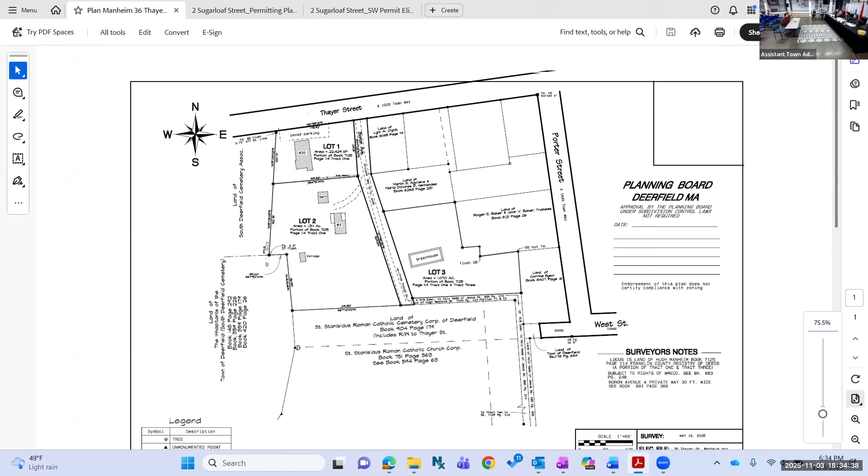Okay, if you'd like to introduce yourself and tell us a little bit about what you do. Hi, so my name is Matt Manheim, and this is Becky Keesby. We're here as a representative for the property owner, Hugh Manheim, looking to break the contiguous property into 3 separate lots: 39 Thayer Street, which is the old BBA Deli as it used to be known; 4 Bourne Avenue, which we're the residents of; and then the lot across the street with the agricultural greenhouse.

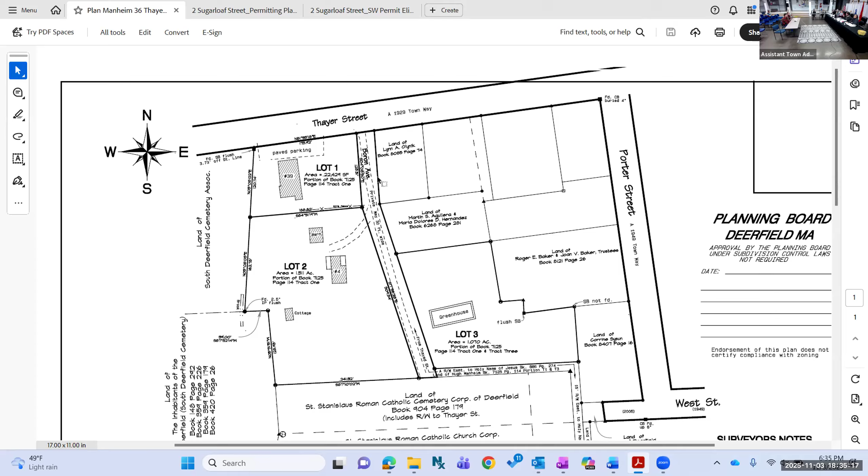So the question was whether you have enough frontage, including on Bourne Avenue. Does everyone from the planning board follow? There's so many lines, it was a little confusing looking at it. Lot 1, lot 2, lot 3 — lot 1 is going to be the smallest one, then we've got lot 2, and lot 3 is the entire area on the right side of the map. Even though lot 2 is on Bourne, it still has enough frontage.

And so, as has been stated, although you could separate them, they aren't necessarily building lots — that's up to meeting with the building inspector to make sure everything works. Correct, yes. Lot 2 already has 4 Bourne Avenue on it, so I'm not looking to build anything on it. I'm just looking to do estate planning, really.

And I think our building commissioner is online too, and as far as I know, he said there are no issues. From the planning board, do I hear questions? Kathy?

Kathy Wittrova: So is Bourne Street a town-owned road? No, it's a private way. So who maintains it and who plows it? That was kind of a question that was up in the air for a while and nobody really knew. Prior to Hugh purchasing the property, the town plowed it. Then once it was discovered it was a private way, I myself have been plowing and maintaining it for now. I know that the cemetery has an easement, as well as 3 Bourne Avenue, and I believe 4 would also have an easement. There are also public utilities that run down it.

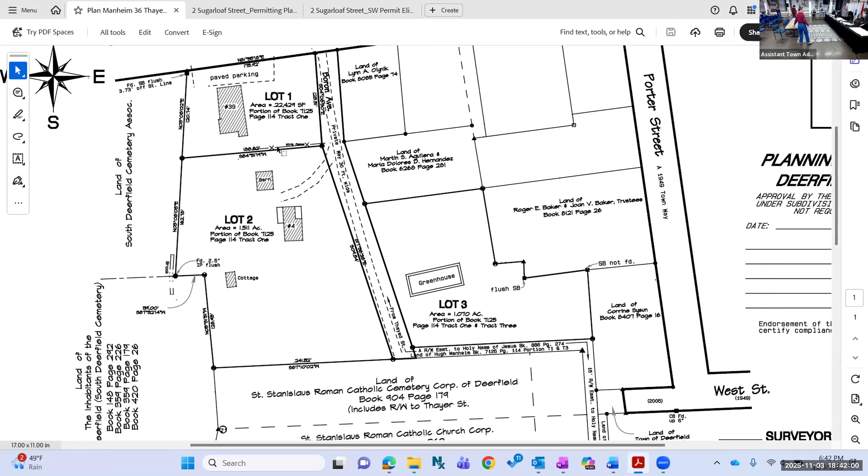Okay, all right, let's get rolling. Oh, deeded easement things. You have a marker? Good enough for that, right?

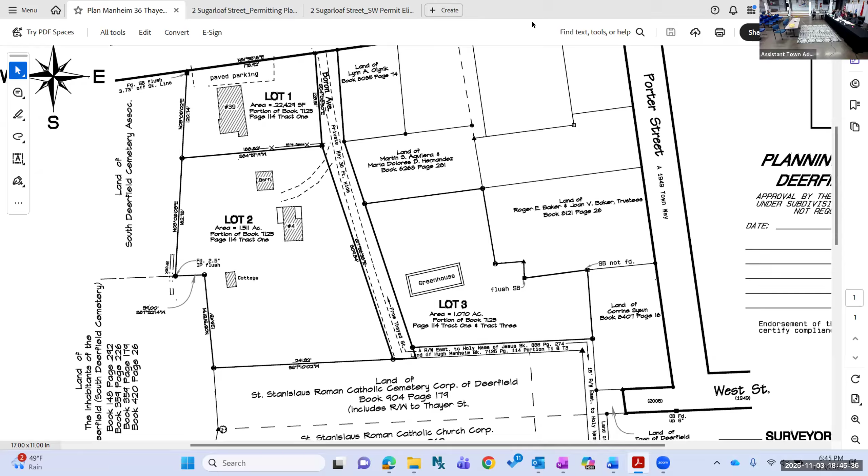Site plan review for 2 Sugarloaf Street. Notice is hereby given that the Deerfield Planning Board will hold a public hearing on Monday, November 3rd, 2025 at 6:30 PM on an application filed by Sugarloaf Development LLC for site plan review for construction of a 3-story mixed-use building with ground floor commercial space and 12 residential units above, located at 2 Sugarloaf, identified in the assessor's records as map 168, lot 13, pursuant to bylaw chapter 179, Section 5400. Application documents are available for review in the foyer of municipal offices or online at www.deerfieldmass.us in the calendar event.

Who writes these, and why are they run-on sentences? It's like, take a breath in between. Yeah, well, lawyers should have their punctuation a little better than that.

Okay, all right, welcome. Speaking of lawyers, for the record, Tom Reidy, an attorney with Bacon Wilson out of Amherst. On behalf of Sugarloaf Development in its application for site plan review, as the chair noted, with me this evening I've got Justin Colleen and Jason Keitsa, the developers, for a very exciting project, a redevelopment here in downtown, just a stone's throw from where we are, at the old Cumberland Farms property.

With us we've got some folks from Proterra, site engineers, Ben and Tom, and we also have Jonathan Salvon from Kuhn Riddle, who is the architect of the project. So, really high level, I'll start, and then I'll turn it over to Jonathan, and then we'll turn it over to Tom, and then back here for questions.

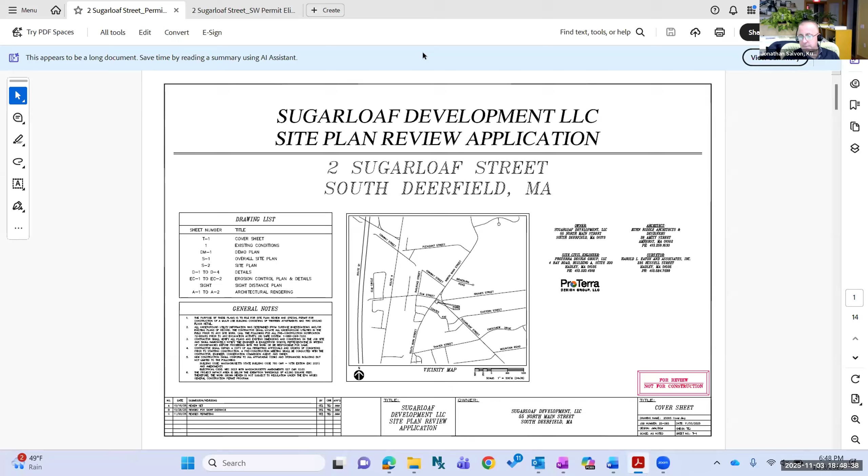I guess I'll start off, make sure folks can hear me. Can folks hear me? You're going to have to speak a little louder. Okay, let me get my mic a little closer to my mouth there. Is that better? Yes? Yes, okay, great. So good evening, I'm going to walk you through the building. I'm going to share my screen if I may. Is that possible? Yes, they just need to give you sharing access. Okay, here we go, that should be good now.

Great, should I share the right screen? Let's see here. Okay, does everybody see the Google Earth image? Yes, yes, great. Just to give a quick bit of context, as Tom said, it's very close to where you're meeting right now.

I'm sure everyone knows where it is, but just for full clarity and to start the conversation, we're looking at this site here where the Cumberland Farms was for a long time. It's sort of like a gap, almost a missing hole in the center of the town, that's really looking to get that space filled in and look like it's more properly part of downtown. So that was where we started with our thinking when Jason approached me to look at this site — how do we fill it in appropriately.

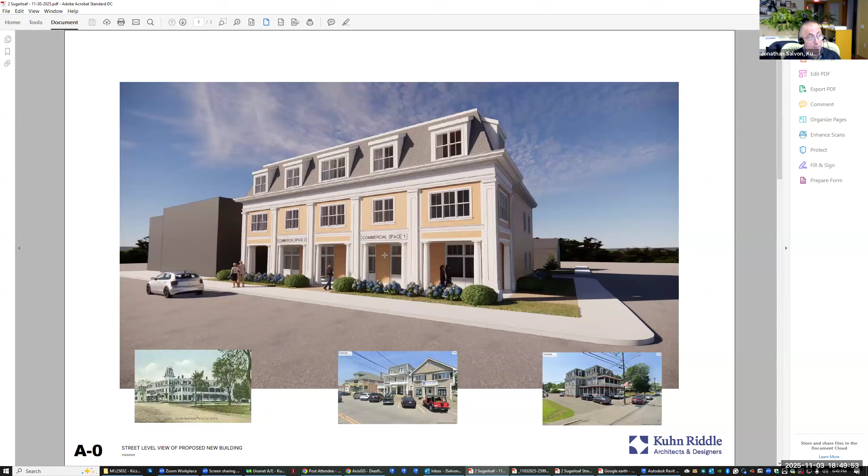So I'm going to take this down and show you the exterior of what we're proposing. Obviously we're standing somewhere in the middle of Sugarloaf Street here looking at the building. One of the first things I did was to think and look and see what could be the precedents for a 3-story building in the center of town.

There are a couple of buildings, one at 6 Elm Street, one at 13 Elm Street, that have kind of a mansard look, a 2-story with a 3rd story that's kind of tucked behind a mansard roof. Doing a little more digging online, I found this wonderful photo of a 19th century hotel that occupied the site across the street that apparently sadly burned down at some point. So there is this precedent for the aesthetic we're presenting here today.

Just to orient you a little bit, again we're standing in Sugarloaf Street. The existing building in gray here, these are the 2 buildings that front Sugarloaf. The Wolfies building is kind of poking out a little bit behind our building over here. We would obviously take down the entire Cumberland Farms building.

Just switching pages here, for the details of the site plan, please look at the Proterra drawings. This is really just for orientation, but the existing building kind of sits back here, tucked in very close to the Wolfies restaurant. We're proposing to move the building up to align with the Sugarloaf building, so that it has a presence on the street.

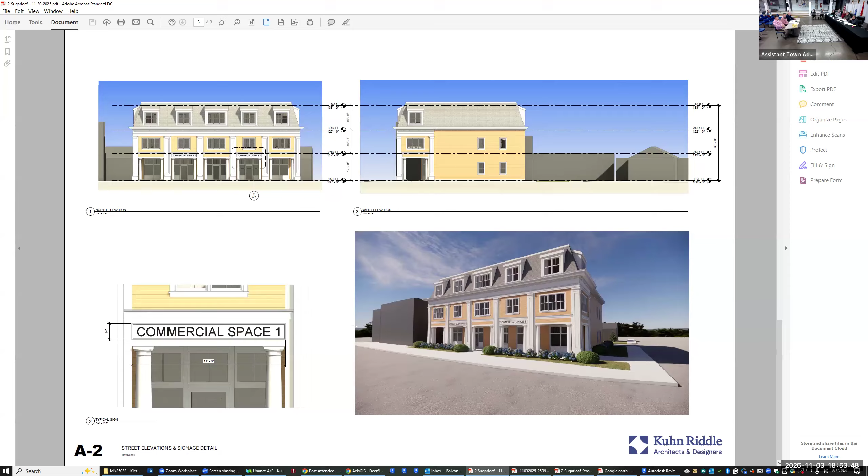This is Rachel Blaine. I know you'll get to it, parking, so I'm not going to ask about that, but with the main accesses, they're not from the front, right? They're going to be from the back? For parking, main access residential?

So obviously it's a very small lot, and we will talk a little more about the parking, but since Jason owns both of these parcels, the expectation is that they're going to have to share parking between the two. There's really only space for 2 accessible parking places behind the building, as well as a dumpster. Then there are, I believe, I've said 16 here, but I would go by the numbers on the Proterra site plan in case I've transcribed them incorrectly.

But what I'm asking, now maybe my orientation's off, but what I'm asking is, so access is from the back of the building for residential, is it, or is it? You have access actually from either direction. Either direction, both. Yeah, I see, there it is. Okay, there's an entrance on the back, correct, and there's another entrance on the front. Got it, thank you.

Now I see it. Was that another question? I'm sorry, yeah, is it, I'm clear now, sorry. Okay. That's not just a stairwell, that's an access point as well. I see, correct. Is the other an access point as well? This one, it really needs to be, we need a second stair, so this one would be, at least it's intended as egress only. The main stair, the one in the middle, will have the mailboxes next to it, and a way for folks to access storage in the basement and that sort of thing.

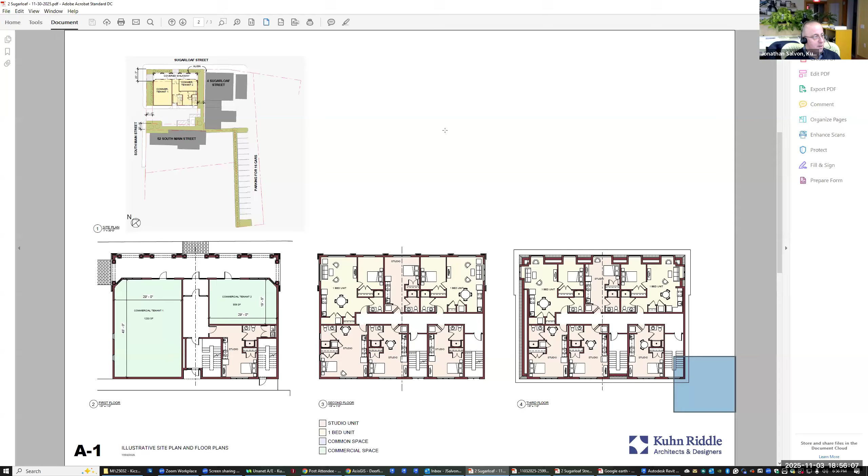And in the parking lot? At that point, we should probably move to the Proterra drawings. Let's put a pin in that.

I don't know if you have other questions for Jonathan at this point. You can obviously go back and forth between and amongst. So Tom, we'll tee you up if you want to walk us through the site plan. Okay, sounds good.

Am I sharing successfully there, and can everyone hear me okay? Yes. Great, thanks. Good evening, this is Tom Johnson with Proterra Design Group.

What I've got up here is the S2 sheet on our set of site plans that have been submitted. I just wanted to note, late this afternoon we sent in an updated set of plans. It incorporates a few more details that we worked through since the initial submittal. I'm sure you haven't had a lot of time to take a look at those, but our thought is that we get them over to you and then step through some of those changes to the plan set tonight, just in the interest of getting them in.

But what you see here - can you see the cursor on the screen here? Yes, okay great. Just for orientation, Sugarloaf Street is up here on the plan sheet. On this side you've got South Main Street, and this is the corner here. The old Cumberland Farms building sat back in the lot here.

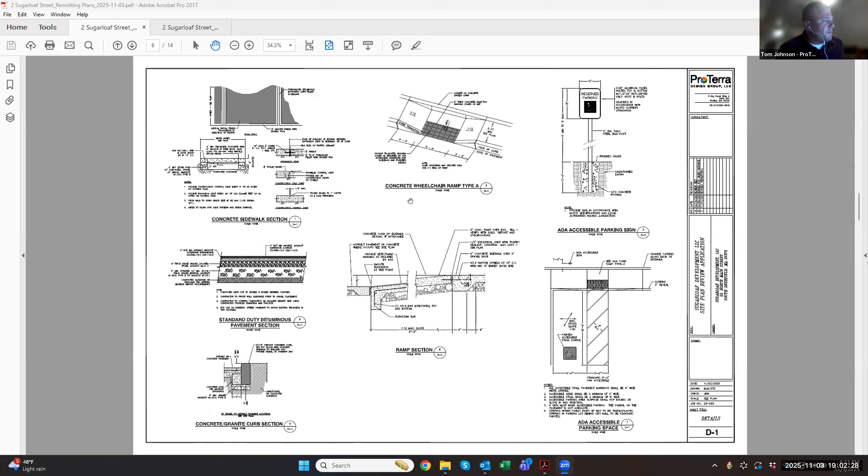As we talked about, there are some parking requirements here. Let's see if I can find the best sheet to talk about that on. Before I get there, we had a chance to submit these to the Chief Pechoric, just to give a review of the plan set. He came back with a comment and had a chance to meet with him and go through the comment.

His one concern was to make sure that any car coming down South Main Street was able to maintain a sight distance and see parked cars coming down, or cars approaching the intersection from Sugarloaf Street. These dash lines are kind of what a traffic book tells you need to have for sight distance.

Based on his input, we had some shrubs proposed on this corner, and we pulled those back. We also had another parking space intended, one more closer to the intersection, and we eliminated that. What it does is it opens up the sight distance even further beyond what the traffic books say you need here.

He took a look at this revised sketch and was happy with it. I think somewhere you'll see some correspondence back to him, from him, to the planning board that says he's happy with the adjustments we made to the plans as a result of his comments.

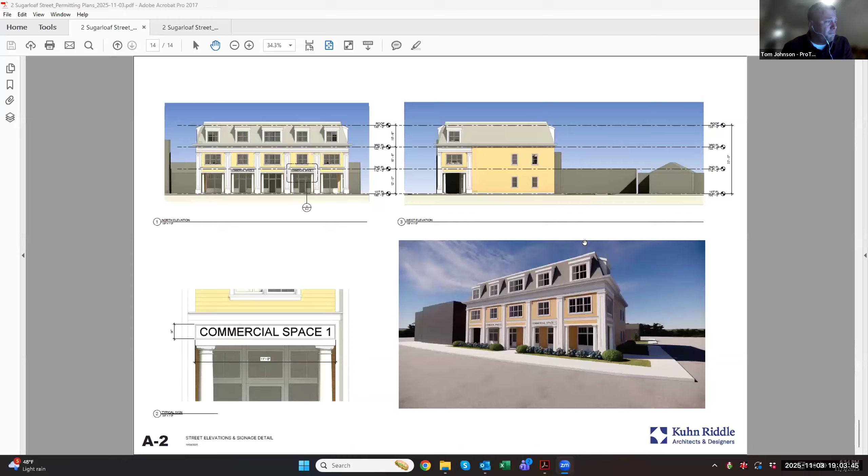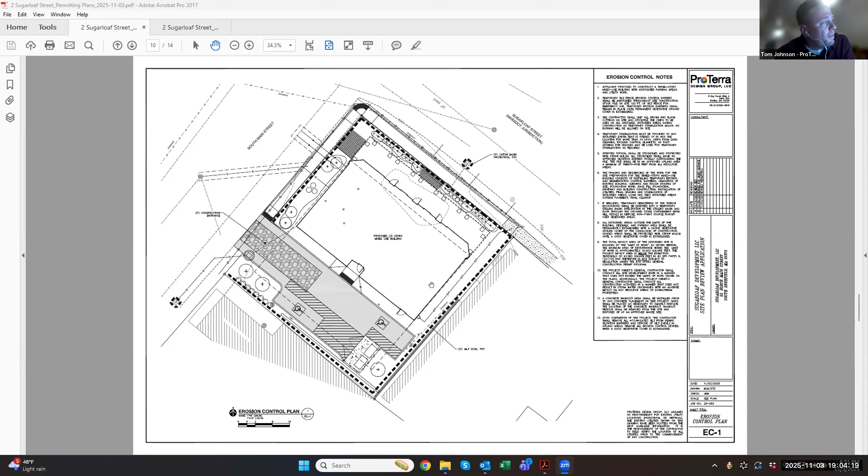These are just kind of typical detail sheets. This is an erosion control plan. Our intent would be prior to the start of construction to wrap the construction site in a silt sock, put a silt bag in the existing catch basins at the street level, and put a little bit of a construction entrance in here, just ways to control and mitigate for any erosion that may occur and limit any silt-laden runoff from the site. That's its own kind of sheet on the plan set here.

Okay, here it is, this is the one I'm looking for. As mentioned, we're proposing 2 parking spaces behind the building. We've got a space planned for 2 in front of the building here. This obviously will require coordination with DOT. And then there's an existing parking lot, which is on the other side of 4 Sugarloaf Street.

That right now is a gravel parking lot. For the purposes of parking space count, we kind of laid it in here and then fit standard parking spaces and came up with a parking space count. You can see we've got 2 parallel, 4, 16, and 12 here. And there are some existing dumpsters for this building that we've kind of put as a placeholder here.

So from that, for 2 Sugarloaf Street, we're saying based upon the zoning as it currently exists, there's a requirement for 40 spaces. One of the things that we talked about, and I know Jason and Justin have maybe talked about prior to submitting the application, was that because these are units, but the majority of them are smaller units, studio type apartments, and they have experience with these types of apartments in this area as well.

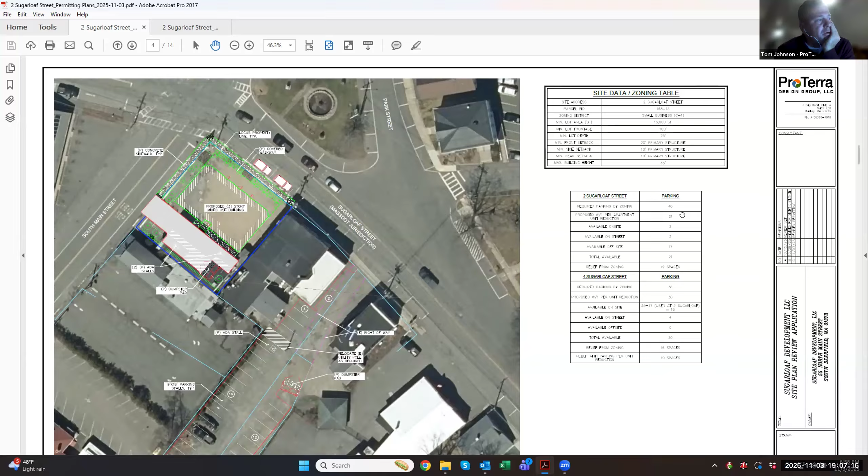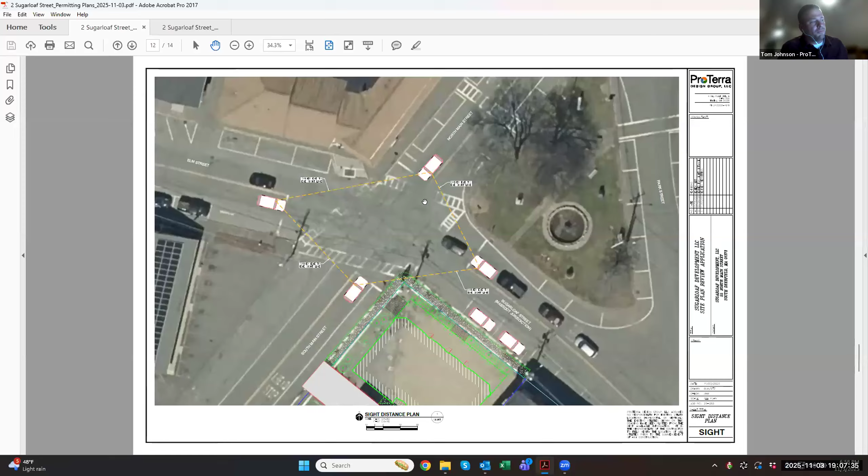Yep, so given that we're able to match the 21 required with the 21 at a 1 per unit count. I have a quick question - is that an indicator that each living unit has one car? Yes. Even the one bedrooms? Yes. You can see that.

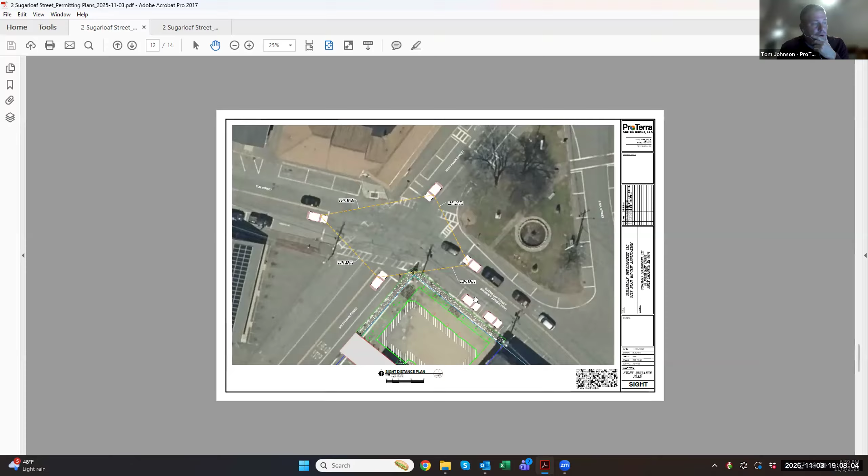Are there dedicated commercial space cars? Sure, so there are 2 spots proposed right in front of the building on the street. There's also other street parking available here, and there's also the Leary lot, which is on the opposite side of the intersection. So there are other available street parking spots, but yes, in that overall count, the required number is taking into consideration the number required for the square footage of the retail space there. Thank you.

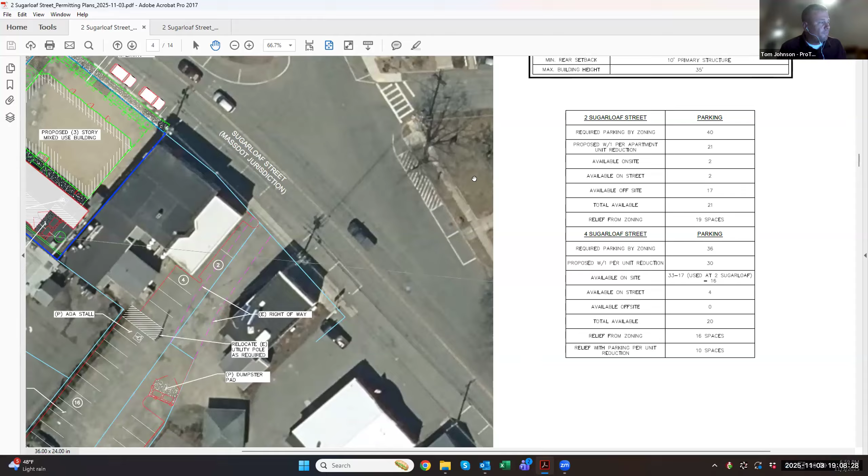I guess the assumption is that no couples are gonna live in a 1-bedroom apartment? If a couple had 2 cars, we would hope the town would consider some of the on-street parking or the Leary lot for them to utilize. We own a myriad of other property in this town, and none of those have a 2.5 per unit parking ratio. In fact, you might have 1 parking spot per unit at most. And so our typical problems are not our tenants - there are other downtown cars parking in our spots, which creates a lack of parking for us.

So these are resident parking only, so that it's clear these people have someplace to park. Your tenants would all be allocated one resident dedicated parking spot per unit, right? Yep. Which, what I'm saying is, then sufficient for us for the other 100 apartments we have downtown.

I would say there's probably also a chance that a number of folks actually don't have any cars. You're on the bus line, and these are small studio apartments - I wouldn't say very small, but smaller studio apartments. So it's not necessarily set up for more than 2 people.

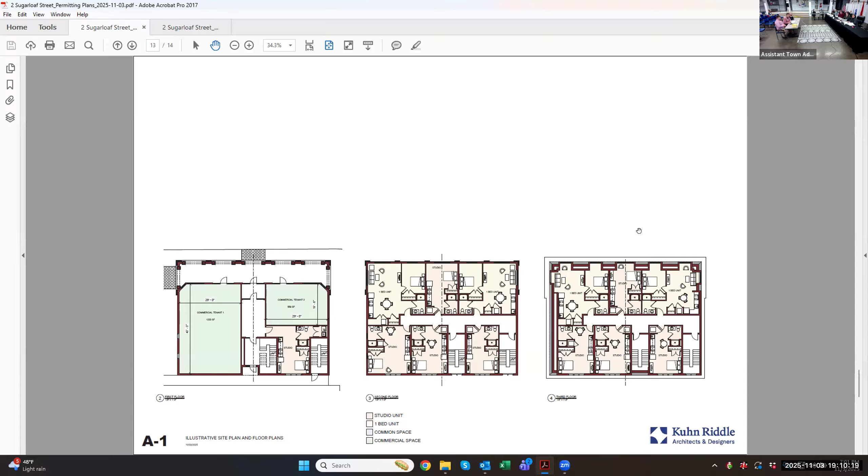Sorry, I have one more question about the parking. So I'm looking at where the ADA parking is, and I'm curious about the access to the building from the ADA spot. So there's 2 ADA spots right behind the building here, and access is through this door. Right.

I think the other consideration is that from May until September, Treehouse is rocking, literally. And the parking is so congested - in theory everybody goes to Yankee Candle and they're shuttled, but really the parking in South Deerfield is jammed. There is nowhere to park or turn. For that huge span of time, parking is a real consideration. It's just trying to go pick up a pizza, never mind people living there trying to park and manage their own singular parking space.

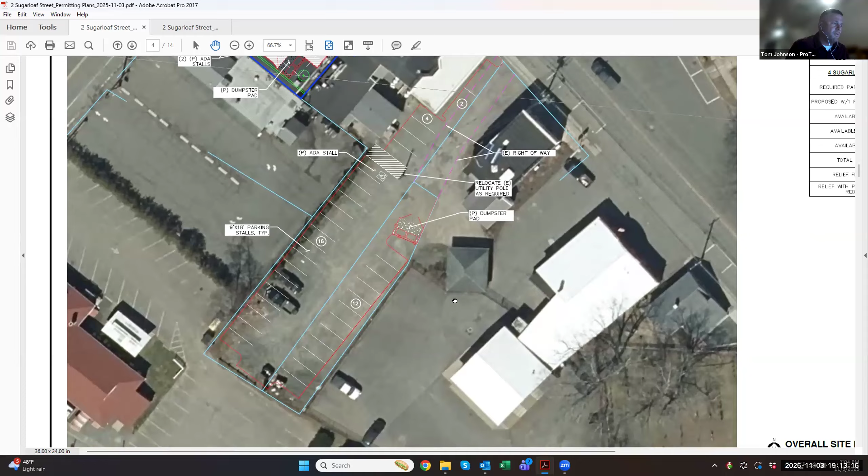So this whole blue area is the old lot line, so these are contiguous. It is one big parking area here. If you're familiar, Fisher's is here — they have a fenced, paved parking lot back in this area. And on this side is the Polish Club, and this is Wolfie's kind of.

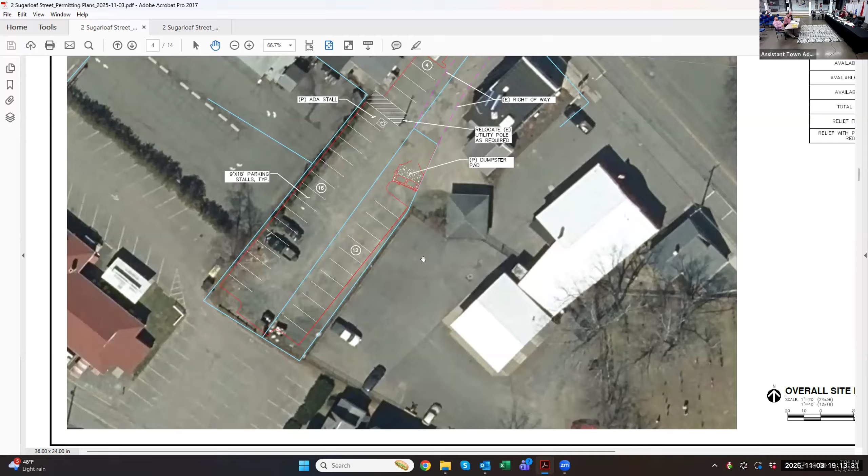So within the red outline, you're saying there's 16, 12, 4, and 2. Okay, so is that parking lot utilized by other businesses? Because you said you guys own the building at 4 Sugarloaf. So how many spaces are taken during the day? Is it just during the day?

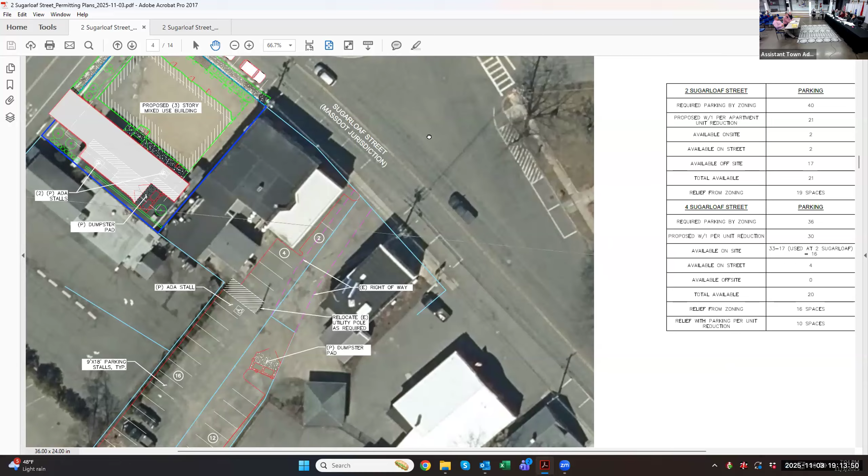Okay, six spaces. And I have a question for Alex, if you know — how many spaces are in the Leary lot? And are there also spaces for the apartments in the back? Do you know how many are utilized there? Because making the assumption that people can park in the Leary lot may not be a good assumption.

It's empty right now, though. I drove by on the way in and it was empty — our lot was full, but the Leary lot doesn't get a lot of use on this side, at least. So there's definitely a lot of potential there. Maybe everyone's out on the town, or down at something else. I don't know.

I can't remember the exact counts, but I'm pretty sure there are upwards of 55 parking spaces in the Leary lot, not including accessible spaces. We don't have true data on usability, but I've gone over there a lot to take photos for our Elm Street project and for murals for LCC. I don't think I've ever seen it even close to 50% full.

Maybe more than 10 cars there at most, even with downtown full. We own 55 North Main Street, and that gets jam-packed with cars. The Leary lot could take more, but — sorry, I'm done.

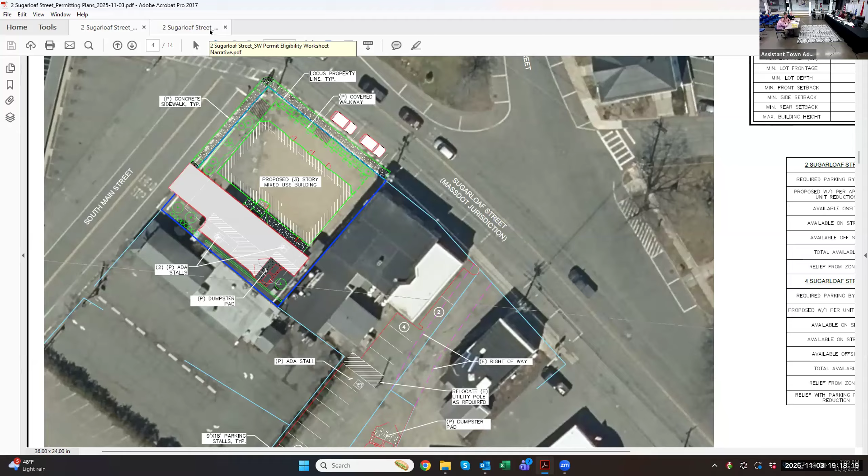Can you answer that, Tom? Paving, you're saying? How much paving are we adding? Yep. I mean, the site already has pavement on it, and I think this is what the applicant was just pointing to, is that they're not changing a lot of the pervious nature of the spot.

So that's what I- yeah, actually, it's a good question, and it's also something I forgot to step through. One of the other things that we submitted late today was the Town of Deerfield Stormwater Permit worksheet.

And I will answer the pavement question here. We stepped through this because of the size of the lot, which is around 9,000 square feet. We're under the threshold required to go through the stormwater permit process with the town. So this just documents that we're under that 12,500 square foot threshold. But...

We did put together a little memo at the end of this checklist here. Somewhere in here - so the existing site is currently 98% impervious. They have ripped up the old tanks and that's gravel now, but historically that's all been paved and impervious. The proposed improvements will reduce the impervious area by about 2,614 square feet, so that puts us at 70% coverage.

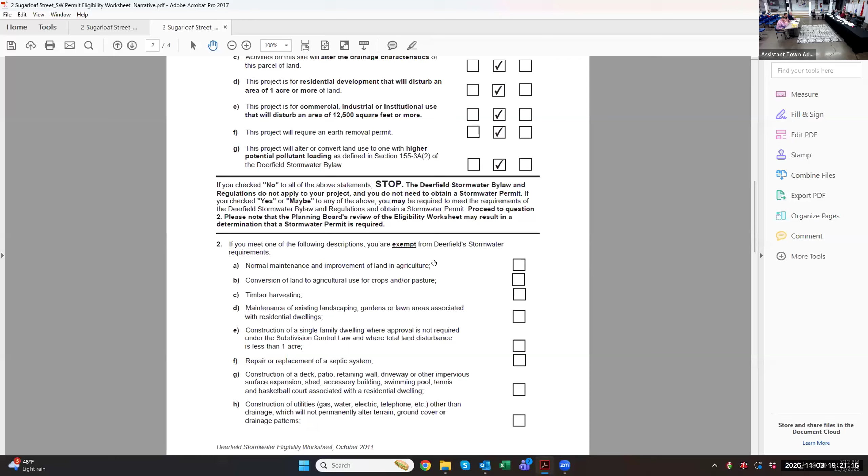So I have a question. It says this is a new development or redevelopment project and it's marked no. So what is it classified as if it's neither of those? So this we went around in the office going, what the heck does this sheet mean here? If you look at number E, it says, well, if you're commercial and you're under 12,500 square feet, you say no.

And what we finally realized is you had to go into the definitions here, and redevelopment is defined as any construction, alteration, transportation, or improvement exceeding land disturbance of 12,500 square feet, where the existing land use is commercial. So it's saying if you were to be called redevelopment, it has to be more than 12,500 square feet. And in this case, we're below that 12,500 square feet.

So no - a new development would be, if I understand this right, and I think Ben from my office is on here, he can correct me if I'm wrong, but I think new development would be a treed, undeveloped lot that you're starting from scratch.

Okay, so because you're under 12,500 square feet, it does not fit the definition of redevelopment. And yeah, because there's already development there, it's not a new development because you're removing development. Yeah, it doesn't start off as a development. Okay, right, all right, that's tricky. Okay good, thank you.

That went through us, we had to - okay, it took us a little sorting to figure that one out. Yeah, for sure. I think we should update our form - yeah, update our form, and understand the distinction, because it sets it in, this is what I was saying before, a bigger spot. Like, sorry, it sets the project in a more significant impact category. So anyway, but we might put it a better way to make it clearer what we're aiming for there.

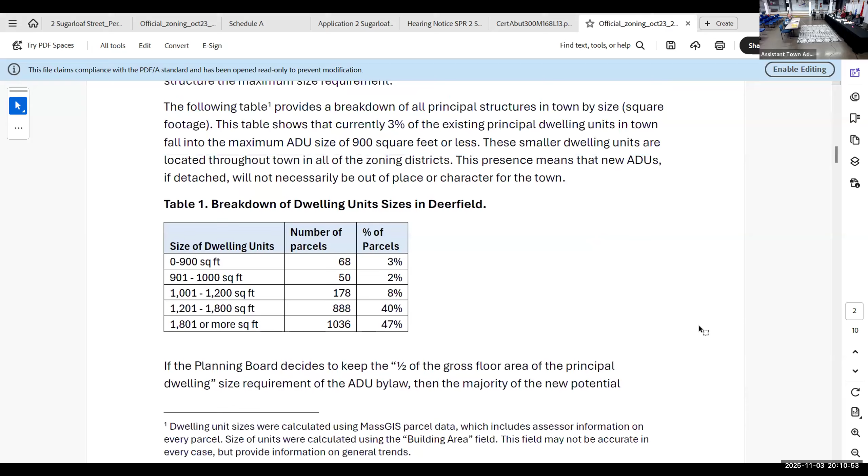So if, Alex, if you want to switch to page 2 - there's a table, we did a breakdown of all parcels here in town, and it shows that 3% of your existing dwelling units right now are about the size of what an accessory dwelling unit would be under this new regulation. So it's not going to be out of character. But it does say that the top 4 rows make up 53% of your parcels in town - that's 1,800 square feet and below. So what that shows is that for 53% of the parcels, if they want to make an accessory dwelling unit, it'd be less than 900 square feet.

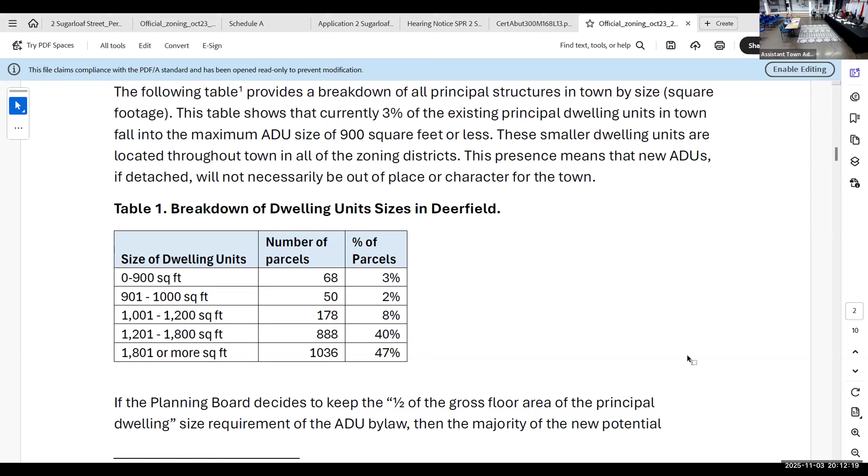And why that's important is because you have the availability, when you do an accessory dwelling unit bylaw, to either keep it as the state presents it, or make it more permissive. You can change the maximum size - keep it at 900 square feet and half the gross floor area, or just say you want it to be 900 square feet, not worrying about the half of the gross floor area, which would simplify things. There's also a third option where you could make it bigger if you'd like - say the largest an accessory dwelling unit could be is 1,000 or 1,200 square feet. That's up to you guys to decide. But as it stands right now, if you adopt it as the state recommends, 53% of the units potentially would actually be smaller than 900 square feet.

And actually, 53%, if you total up the 40% and all the smaller units, they would be smaller than 900 square feet. And if you total up the number of dwelling units that are 1,200 square feet and below, half of that gross floor area is 600 square feet. So what that's saying is that 13% of your parcels could potentially have ADUs only up to 600 square feet. So there are some limiting factors in there.

And maybe that's okay, you're okay with the smaller units. This just provides that information to inform you as you make these decisions, knowing that you might have ADUs on the smaller side, actually smaller than 900 square feet.

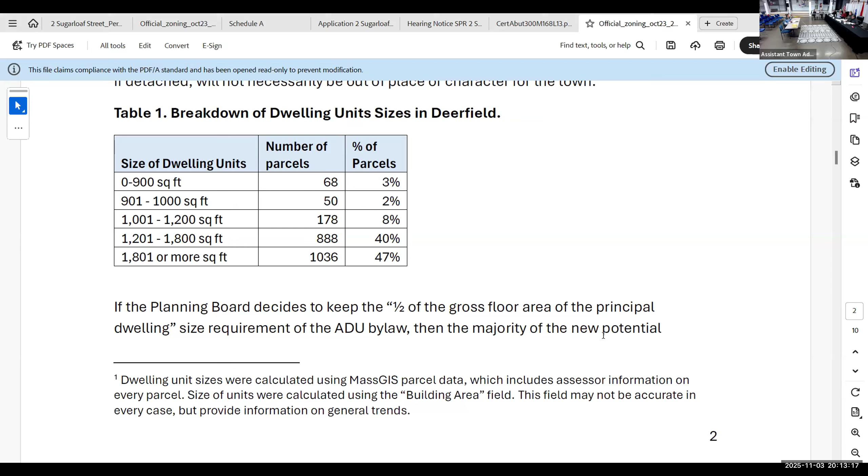Things to consider for informational purposes as you craft the ADU bylaw and how you want to tailor it: the smaller the unit is, the harder and more expensive it is to build. So if this is something you want to encourage in town, you might want to think about allowing larger units.

Because they are more expensive per square foot to get the energy ratings, the stretch code ratings. So we would want to make them bigger because that's easier? It is less expensive to build on a square footage basis, because to be able to meet your HERS ratings and all the other requirements, it's actually easier for larger units. They tend to have to hit the same rating regardless.

No matter what. Right, so if you're building more, you can charge more. Yeah, it's like a cheaper by the dozen thing. So if it's 400 square feet, you have to meet the same requirements for insulation, wiring, etc., as you do for 1,000 square feet. So you might as well go bigger, because you're going to spend the same amount to meet those wiring and insulation requirements either way.

What's also true is air exchanges are harder to do in a smaller building. Often you also have to do more tailoring and customization for smaller units. So it's just something for you to think about if you want to encourage them.

The other thing I didn't put in the memo, and I should have, and I apologize, is something to consider when deciding what size you want accessory dwelling units to be: the state has a grant program called the Housing Choice Designation. It's very similar to the MVP, Municipal Vulnerability Preparedness program. If you meet the criteria to become a housing choice community, you get access to a very large pot of funding. One of those criteria, and you guys aren't far off from meeting it as of last year's criteria, is whether you're more permissive with your accessory dwelling unit bylaw.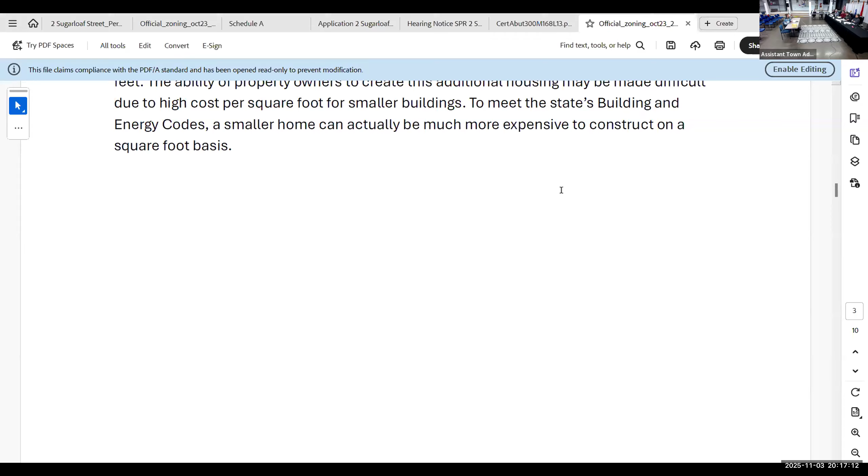That's an incentive for the municipality, not the individual. So that's just something to think about as you have the authority to either keep the criteria as the state has written it, or you can be more progressive. This is just some information to help guide you as you decide how you want to structure it.

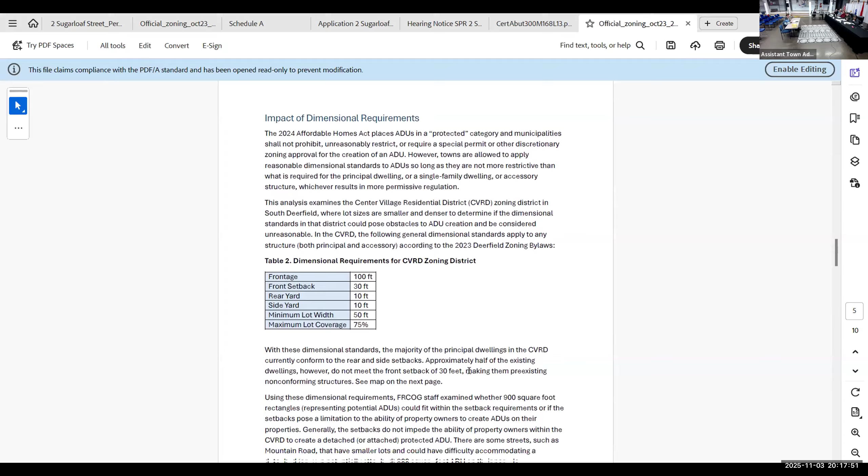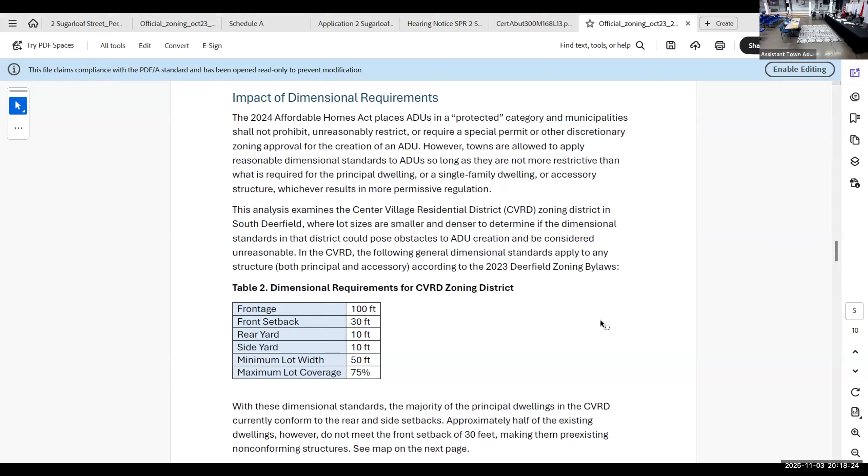Okay, so the next analysis we looked at, we particularly looked at the Central Village Residential District, the CVRD, that's kind of the South Deerfield residential area. For accessory dwelling units, under the state law, you're not allowed to prohibit, unreasonably restrict, or require a special permit or other discretionary zoning approval for the creation of an ADU. However, you are allowed to apply reasonable dimensional standards, such as setbacks and lot coverage, in a reasonable way. So we looked at just the CVRD because they have the smaller lots and denser development, to see if your current dimensional standards might prevent ADUs from being built onto those lots.

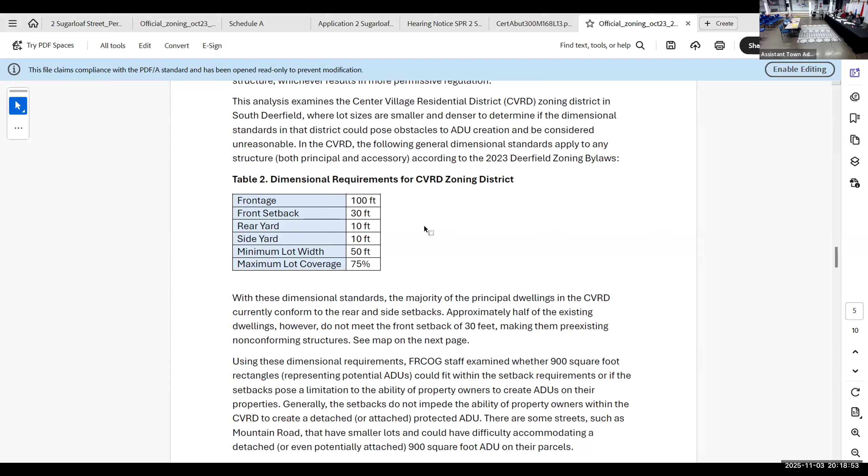So using your current setback requirements, we looked at all of the parcels in the CVRD and found that the existing dwelling units, for the most part, comply with those dimensional standards, except for the front setback. About 50% of your parcels are technically non-conforming because they don't meet that 30-foot front setback. It's just something for you to think about. Even though parcels are technically pre-existing non-conforming, that's not something you can consider when creating an ADU—they still can be allowed, but it's just something for you to think about in terms of what is and isn't non-conforming right now.

When you look at including or allowing a 900 square foot ADU, we wanted to see if you could fit a 900 square foot unit on those lots in addition to the footprints of those buildings, and for the most part, you could. It wasn't a problem. On this map, we've illustrated one little structure that's about 1,000 square feet, just to show how they could fit on parcels within that district. For the most part, it's really not a problem, though Mountain Road has smaller parcels that might be an issue. But overall, the dimensional standards should be applicable to accessory dwelling units in this district. So that's good to know.

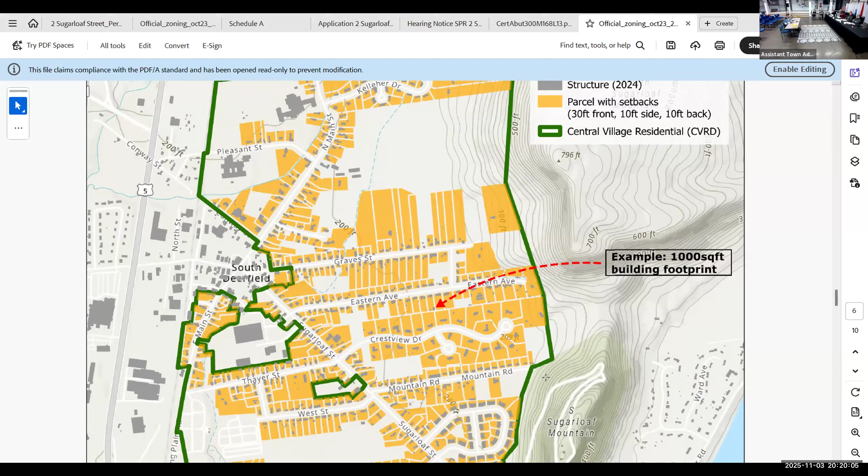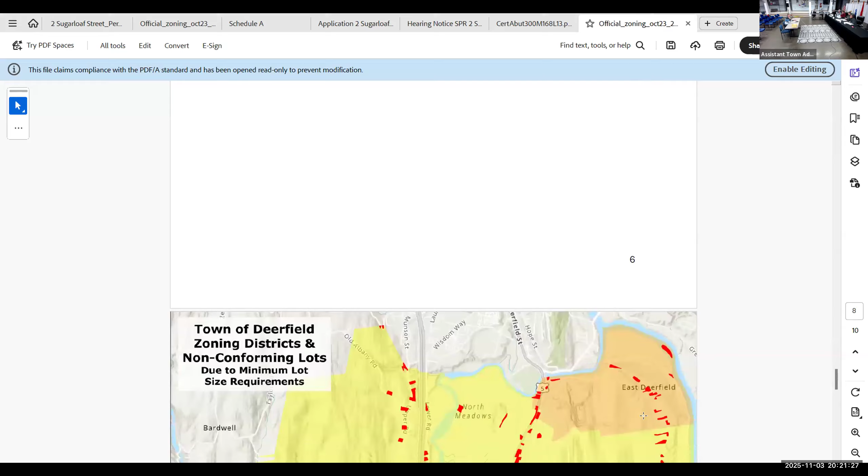So there's a map on the next page that shows the location of all those non-conforming lots, and they are scattered around town, particularly in the RA district. And if you scroll down to see the C1 there, I'm sure it's no surprise—it's very much concentrated in the South Deerfield area, around the Sugarloaf and Elm Street intersections. That's particularly a point if you want to think about redevelopment there.

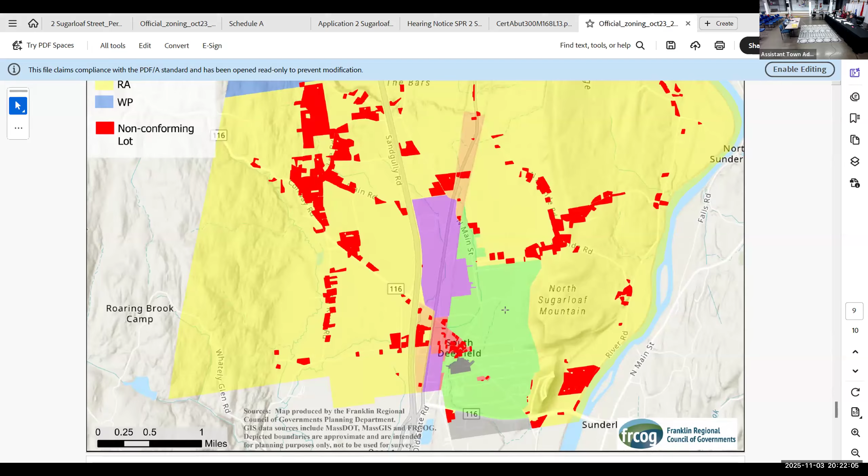So that is a very high level, quick rundown of the analysis. Happy to answer any questions you might have. And all of these are GIS shapefiles that Alex is going to have, so she'll be able to play around and look at all of this data in depth.

Well, it makes sense to look at South Deerfield also just because of sewer. Yeah, and most of the town is on septic, and it's just cost prohibitive.

Even building a standalone unit in South Deerfield is still going to be a lot of money, unless people are doing it within their homes. Yeah, for accessory dwelling units, they're not cheap. It's not an easy thing to do.

They run a lot. It's a lot cheaper if you do it modular, which is allowed, and actually manufactured homes are also allowed under the bylaws. It's half the cost if you do modular construction. But it is not an affordable way of doing it, but it is an option to create more housing if you have the ability.

Do you have any guesstimates on, let's say, a 900-foot modular? I have the note, I was just talking to someone a couple weeks ago. I want to say it was like $100,000. Don't quote me, I have to check my notes, but it's around that to build an accessory dwelling unit. It's about half the cost if you go modular or use a manufactured housing unit. That's a lot more reasonable than trying to build a home with septic and consider.

Yeah, if you're on septic, the cost is way more because you're most likely going to have to get a whole new system. Right.